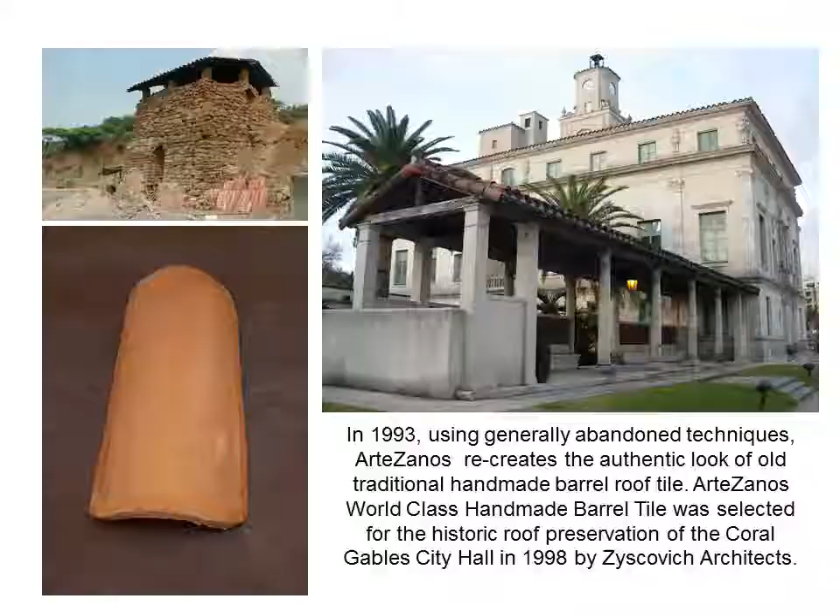During the last Florida construction boom, ArteZanos World Class was in great demand and heavily sought for top-tier projects because of its high quality and superior wind performance.

In 1999, ArteZanos gives birth to the first authentic handmade S tile named Arguey S. This product duplicated the look of the ArteZanos World Class barrel tile more competitively. For many years, it was a popular staple for large high-end developments and companies seeking that unparalleled authentic handmade look.

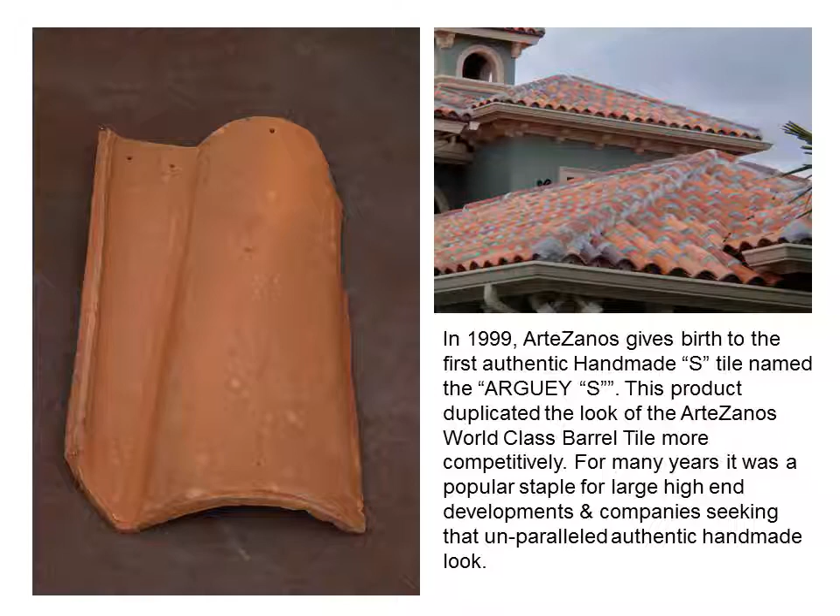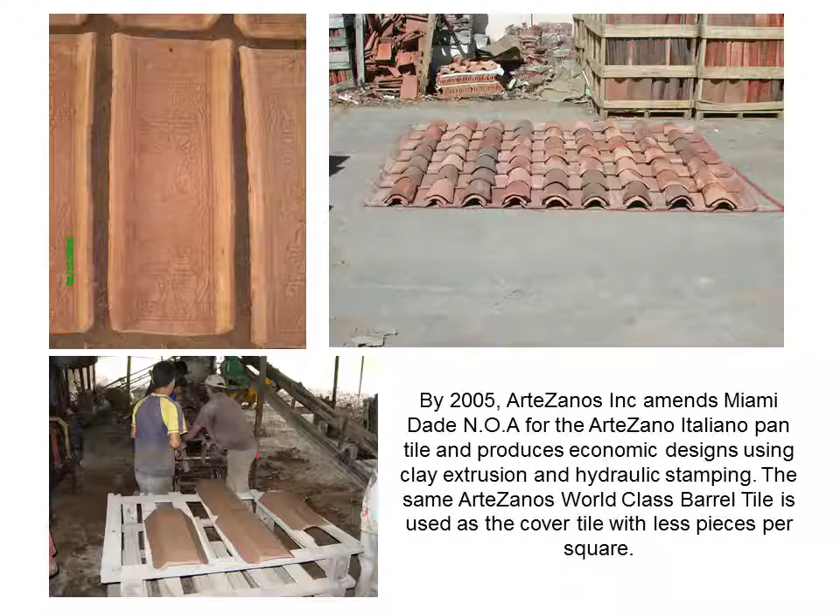By 2005, ArteZanos Inc. amends Miami-Dade County NOA for the ArteZano Italiano pan tile and produces economic designs using clay extrusion and hydraulic stamping. The same ArteZanos World Class barrel tile is used as cover tile with less pieces per square. By 2006, ArteZanos files for various U.S. and European patents on promising new design enhancements.

At the beginning of the economic recession, escalation of fuel prices and transport costs prompt ArteZanos to amend Miami-Dade County NOA in 2008 for this new lightweight hybrid barrel tile system to help reduce costs.

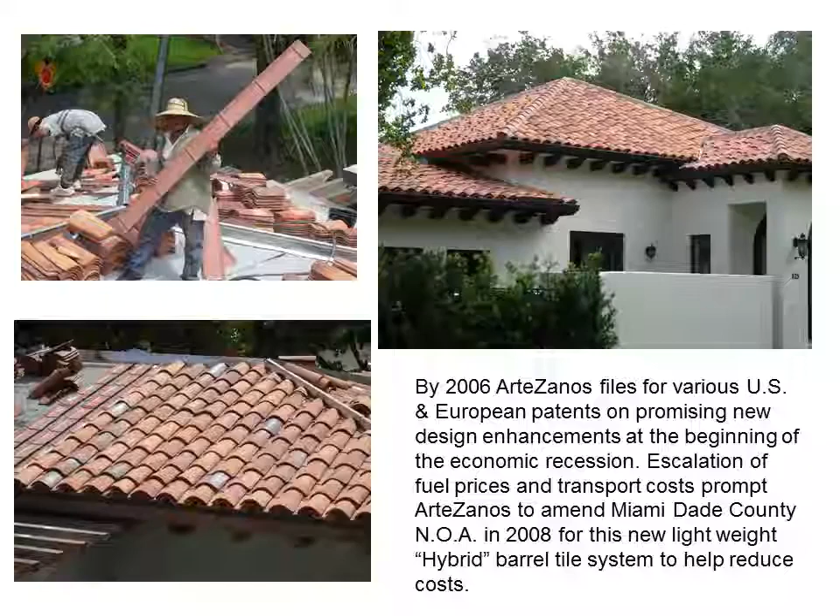Class A fire rated and superior wind uplift. The ArteZanos hybrid system is designated Class A fire tested by Southwest Research Labs. Informal uplift testing conducted at the Polyfoam Products Lab confirmed the superior uplift resistance when foamed down to a single mechanically fastened synthetic underlayment.

In 2009, the Miami-Dade County Board of Rules and Appeals rules the ArteZanos hybrid is indeed an innovative hybrid green roof system under Section 1512.2.2 of the Florida Building Code, and can be used over mechanically fastened synthetic underlayment and as a retrofit over existing asphalt shingles pending further testing.

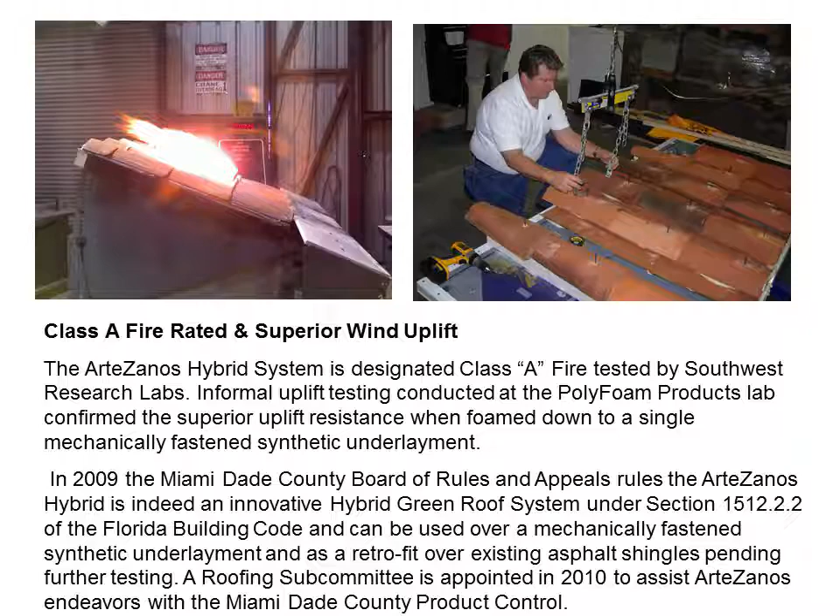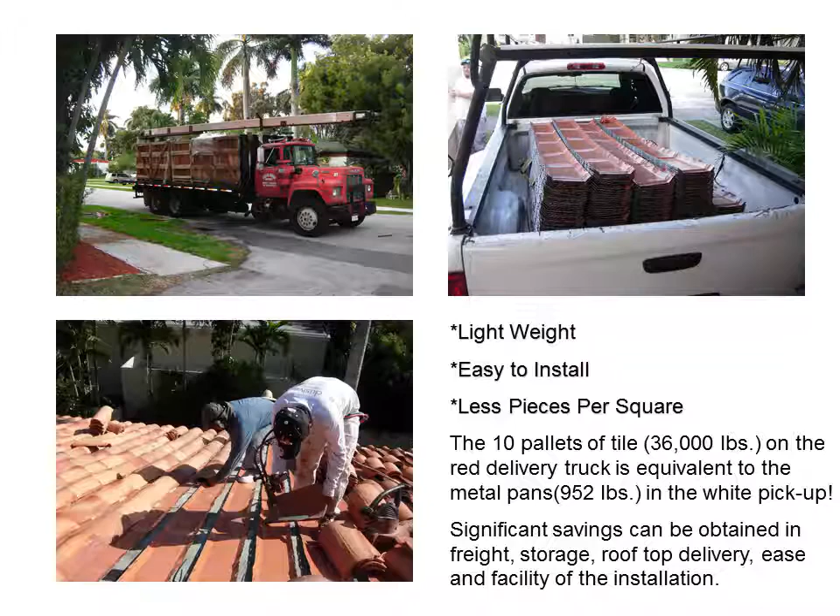A roofing subcommittee is appointed in 2010 to assist ArteZanos endeavors with the Miami-Dade County product control. Lightweight, easy to install, less pieces per square - the 10 pallets of tile on the red delivery truck is equivalent to the metal pans in the white pickup. Significant savings can be obtained in the freight, storage, rooftop delivery, ease and facility of the installation.

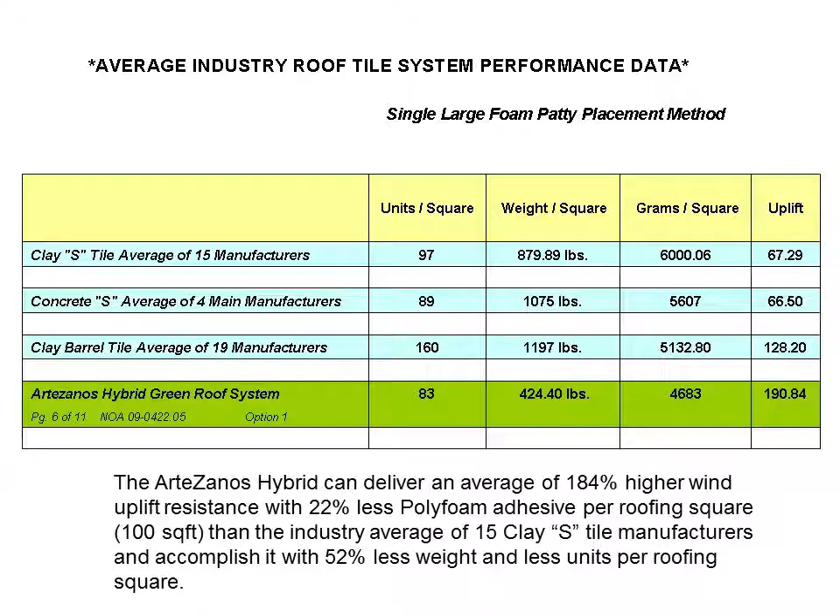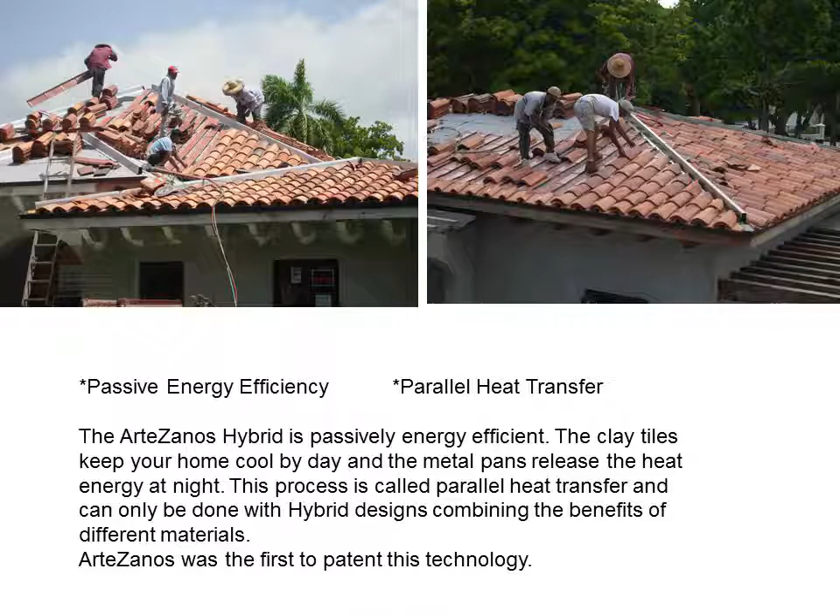The ArteZanos is passively energy efficient. The clay tiles keep your home cool by day and the metal pans release the heat energy at night. This process is called parallel heat transfer and can only be done with hybrid designs combining the benefits of different materials. ArteZanos was the first to patent this technology.

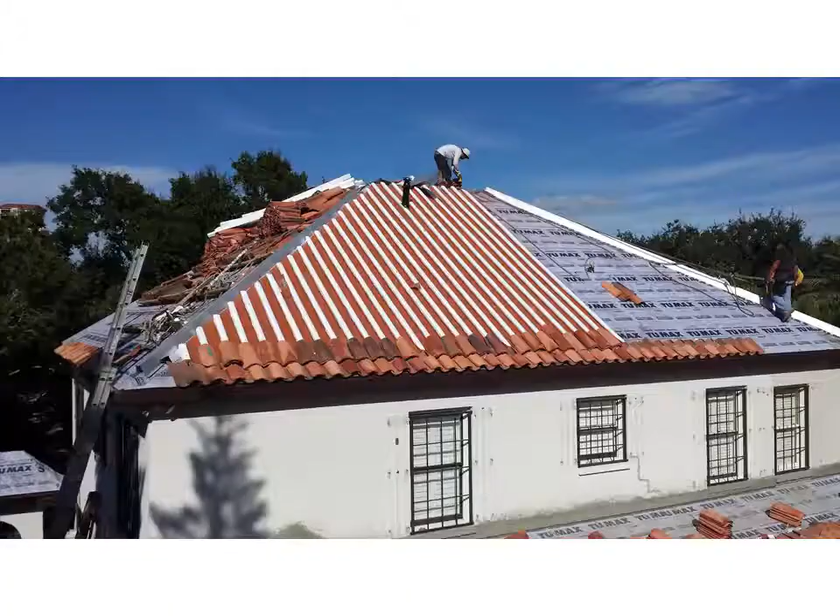ArteZanos Southern French Style Hybrid in Tampa, Florida. ArteZanos Spanish Hybrid in Vero Beach, Florida. ArteZanos Italiano Hybrid in St. Vincent, Grenadines.

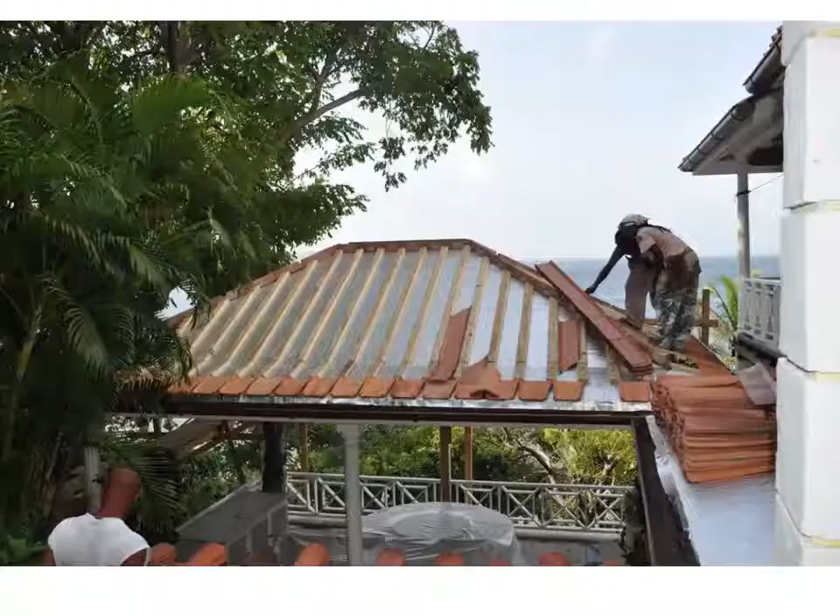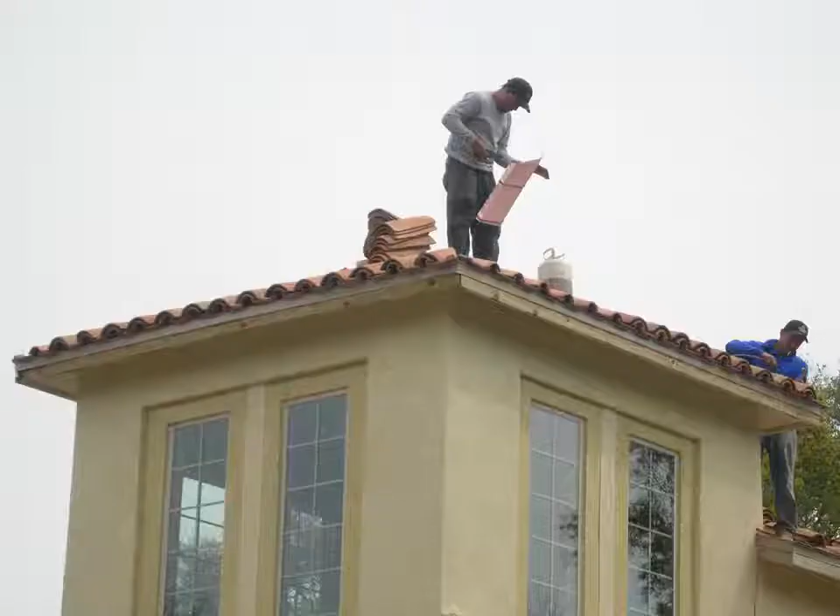ArteZanos Italiano Hybrid in St. Petersburg, Florida. ArteZanos Italiano Hybrid in Hollywood, Florida. Antique Cuban Tile Hybrid in Miami Shores, Florida.

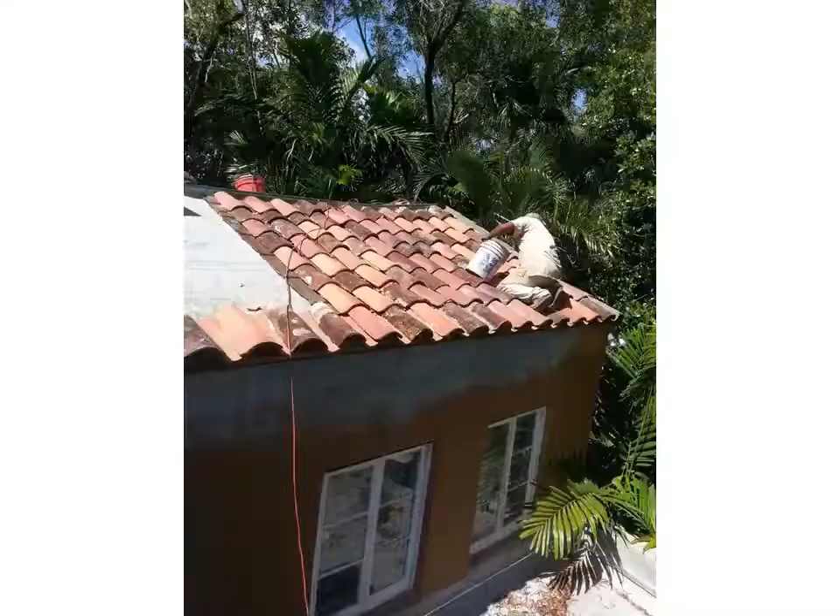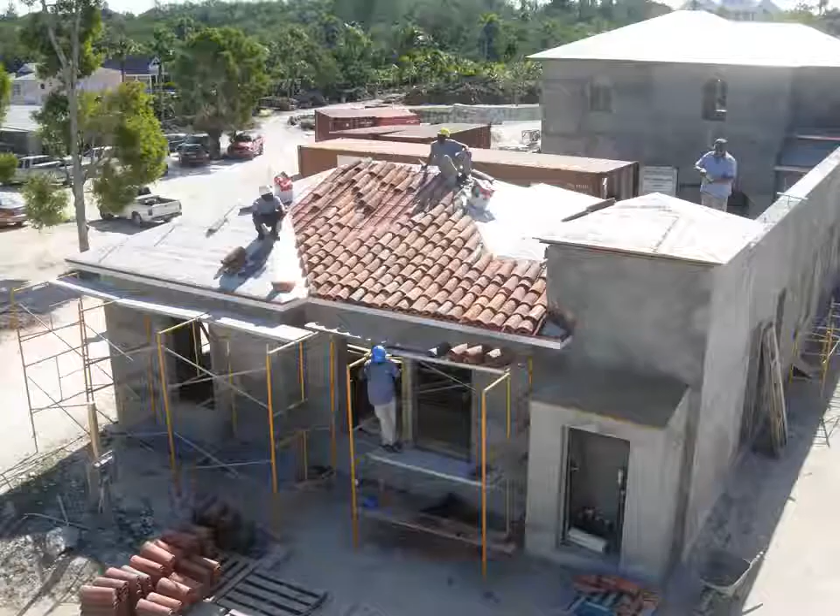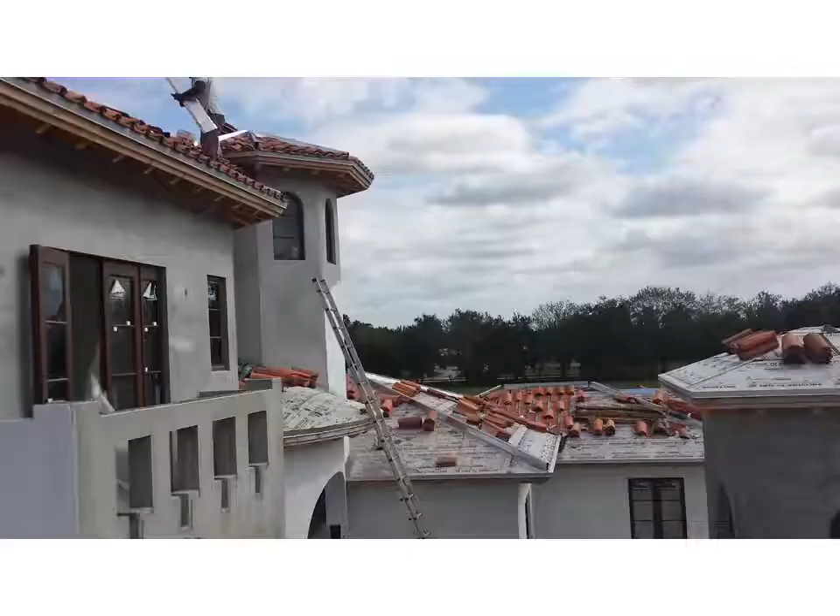MCA roof tile hybrid in Los Angeles, California. ArteZanos Spanish hybrid in Lyford Cay, Nassau, Bahamas. ArteZanos Italiano hybrid in Southwest Ranches, Davie, Florida. ArteZanos Italiano hybrid, Miami Beach, Florida.

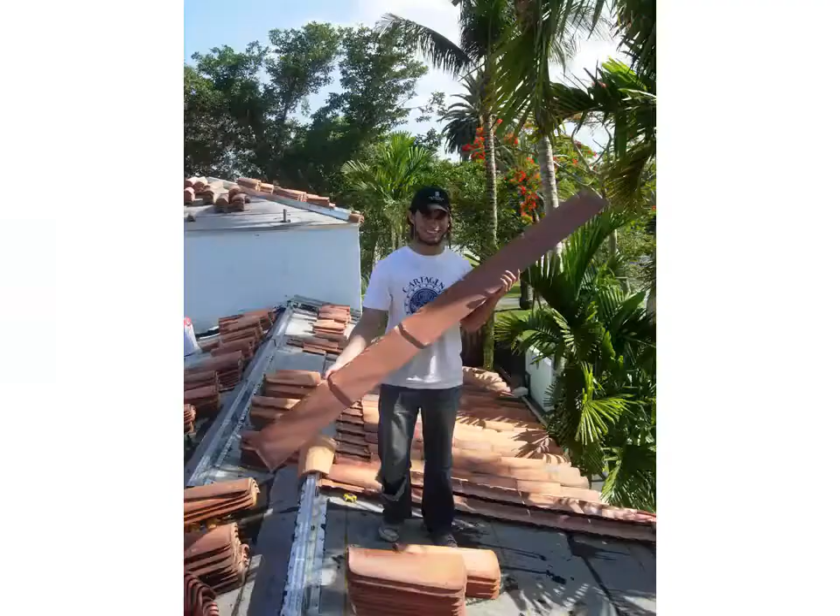ArteZanos Spanish hybrid in Miami Beach, Florida. ArteZanos Italiano hybrid in Miramar, Florida.

Solar thermal option. Domestic hot water can be economically integrated with PEX tubing underneath the roof tile for hot water production, and qualify for a 30% federal tax credit on the entire investment with no cap limitation until December 31st of 2019.

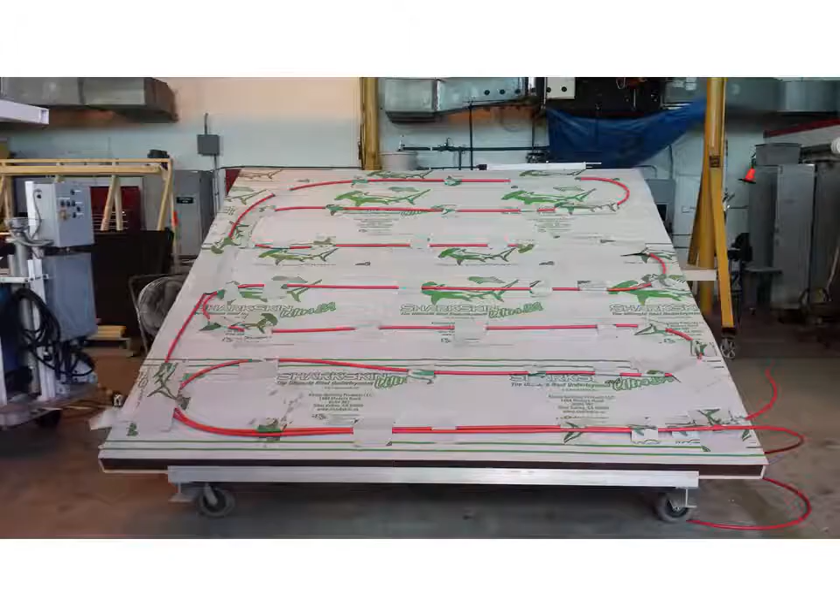The ArteZanos RISA, Roof Integrated Solar Absorber, is certified by the Florida Solar Energy Center, FSEC, number 100-572, and can qualify the roof envelope as a non-glazed solar energy collector.

No penetrations. The ArteZanos solar thermal tubing can easily be fixed to the underlayment without penetrations. This is a very simple process used to harness the heat energy already on the roof to heat water instead of using more expensive electricity.

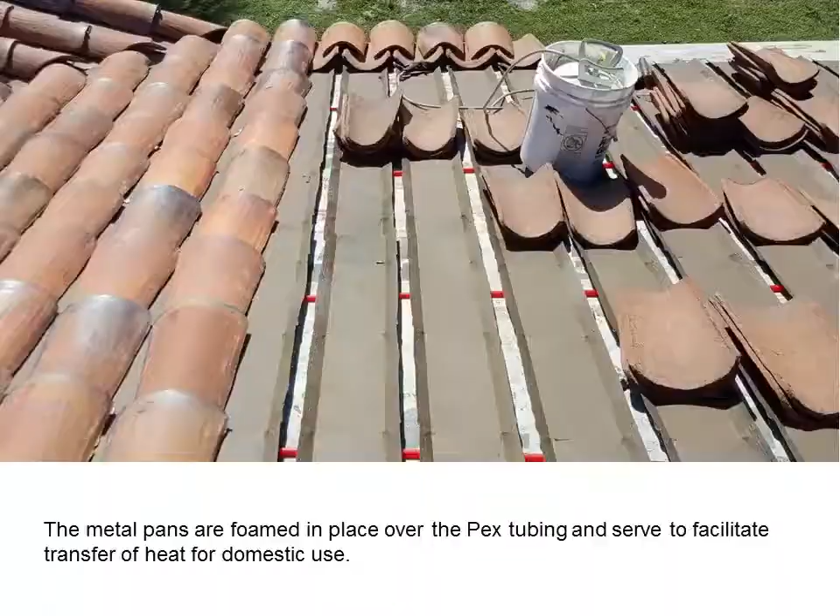The metal pans are foamed in place over the PEX tubing and serve to facilitate transfer of heat for domestic use. Invisible solar thermal - the ArteZanos RISA solar thermal is completely stealth and the most affordable way to integrate solar domestic hot water and/or pool heating systems to the roof.

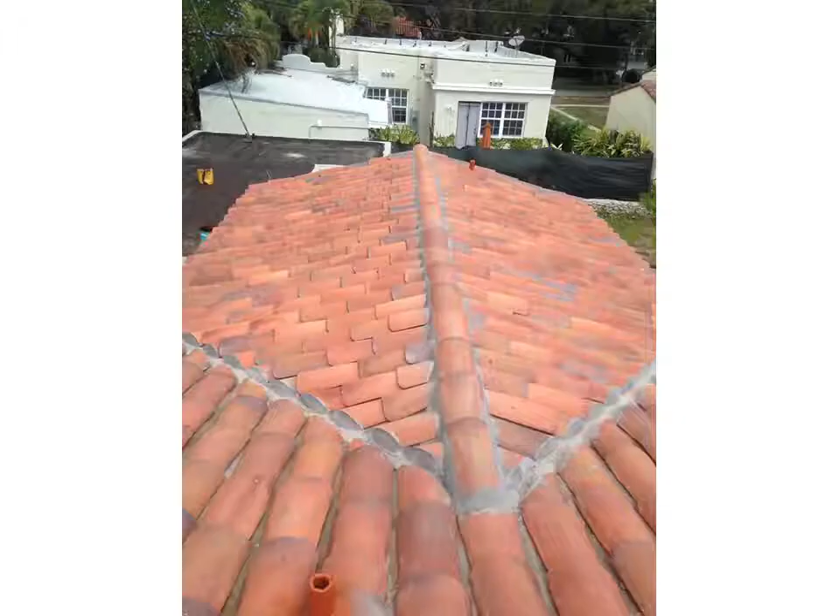ArteZanos hybrid with invisible solar thermal located in Coral Gables, Florida.

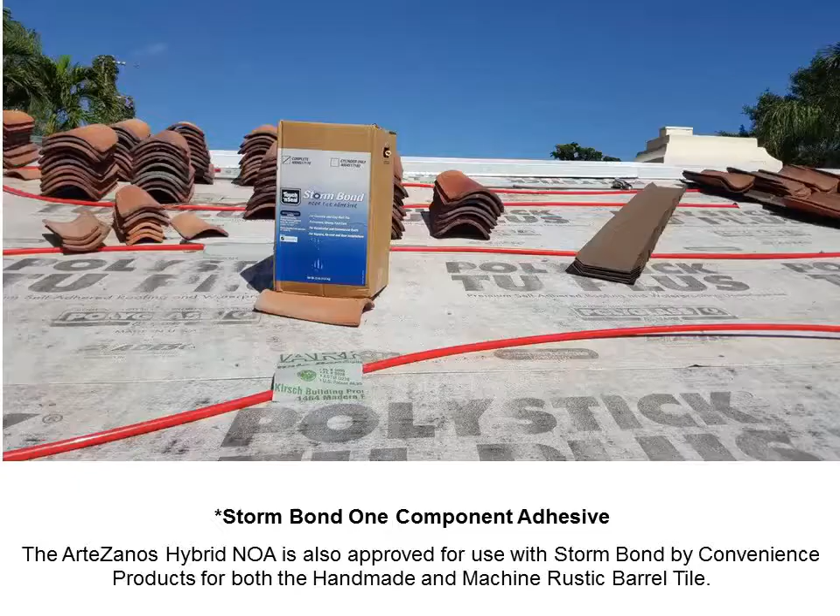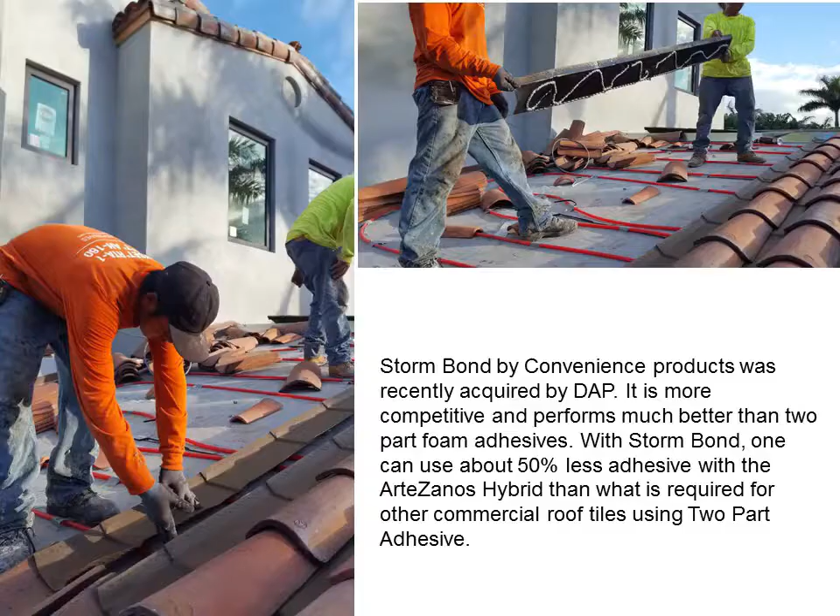Storm Bond 1 component adhesive. The ArteZanos hybrid NOA is also approved for use with Storm Bond by Convenience Products for both the handmade and machine-made rustic barrel tile. Storm Bond by Convenience Products was recently acquired by DAP. It is more competitive and performs much better than two-part foam adhesives. With Storm Bond, one can use about 50% less adhesive with the ArteZanos hybrid than what is required for other commercial roof tiles using the two-part adhesive.

ArteZanos hybrid with invisible solar thermal in Miami Beach, Florida.

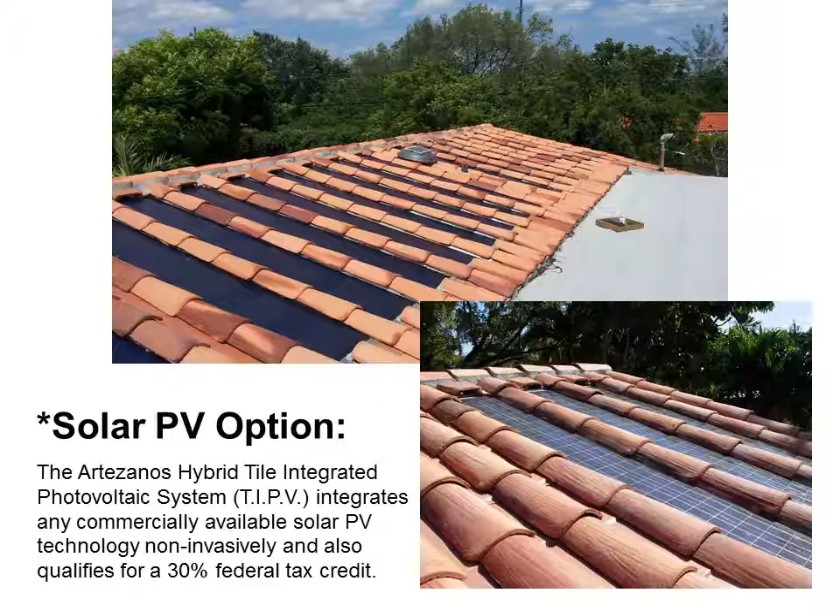Solar PV option. The ArteZanos Hybrid Tile Integrated Photovoltaic System, TIPV, integrates any commercially available solar PV technology non-invasively and also qualifies for a 30% federal tax credit.

The ArteZanos Hybrid Tile Integrated Photovoltaic System, TIPV, is recognized by the State of Florida Construction Industry Licensing Board as being the only PV system within a roofer's scope of licensure. Grid connection requires an electrician as per DEC Statement DS 2011-060.

PV and solar thermal pool heating. The ArteZanos TIPV can be integrated with both domestic hot water and/or pool heating. The circulation of cool pool water through a hybrid roof can lower roof temperatures to minimize air conditioning loads.

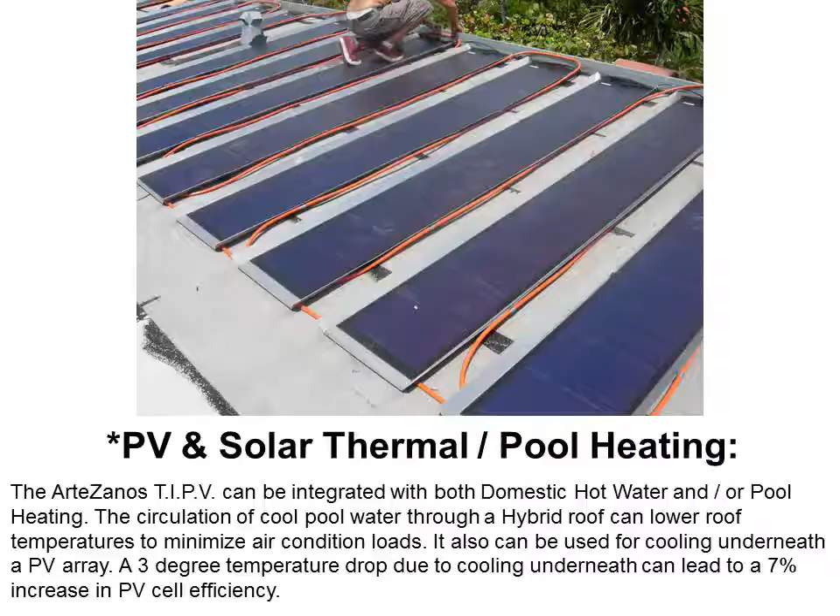Historic residence with ArteZanos hybrid TIPV and solar pool heating in Miami, Florida.

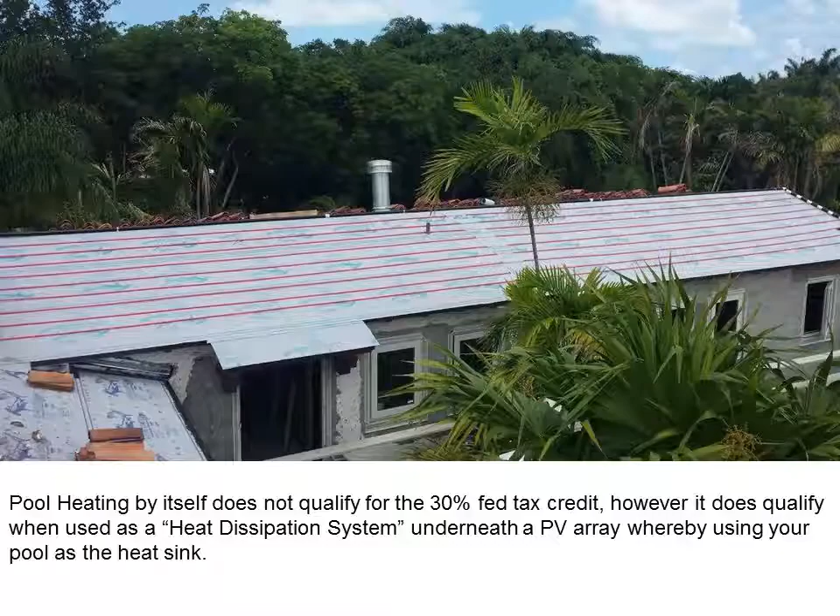Pool heating by itself does not qualify for the 30% federal tax credit. However, it does qualify when used as a heat dissipation system underneath a PV array, whereby using your pool as the heat sink. Sharkskin Ultra SA can be used to secure PEX lines in place without penetration.

It has a superior adhesion and 320-degree melting point, ideal for solar energy systems.

VersaShield is used directly beneath underlayments designated for PV array footprint to maintain the Class A fire rating.

ArteZanos solar metal pan above, SoloPower SP1 flexible CIGS solar module below. The Storm Bond is ideal for adhering the SoloPower SP1 to the ArteZanos solar metal pan because it has a low rise and minimal exothermic reaction. It will not harm the PEX tubing as well.

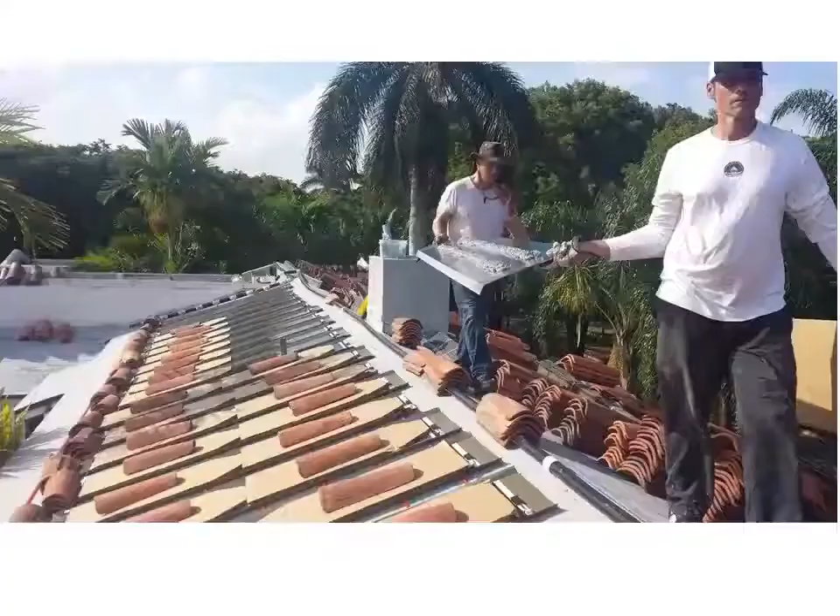Made in USA. SoloPower SP1 flexible CIGS solar modules are made in Portland, Oregon. They are lightweight and conveniently installed without any penetrations to the roof deck. The SoloPower SP1 is flexible, durable, and made without glass.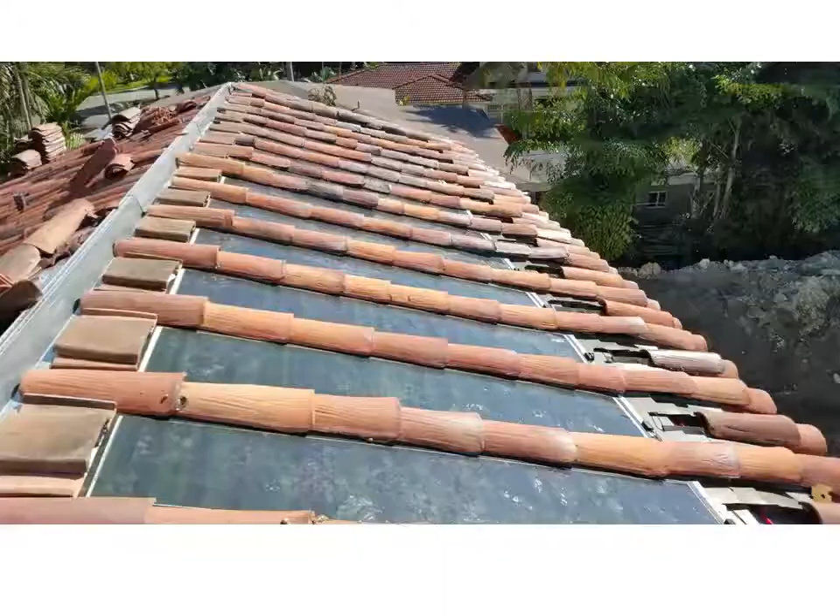Stacked eave treatments using ArteZanos baby barrel tiles make this install unique.

Designed for minimal visual impact, the ArteZanos TIPV on the second story is just barely visible from the extreme rear of the residence. The solar PV array also offsets traditional roof tile expense by eliminating tile area now occupied by solar.

ArteZanos Hybrid TIPV and Solar Thermal in Miami Beach, Florida. Rear view.

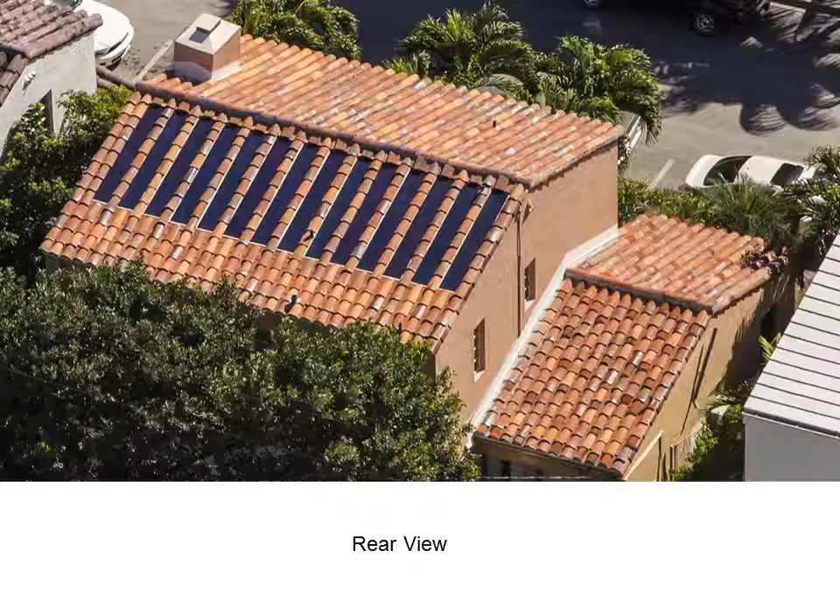ArteZanos Hybrid TIPV with integrated solar pool heating in Miami, Florida.

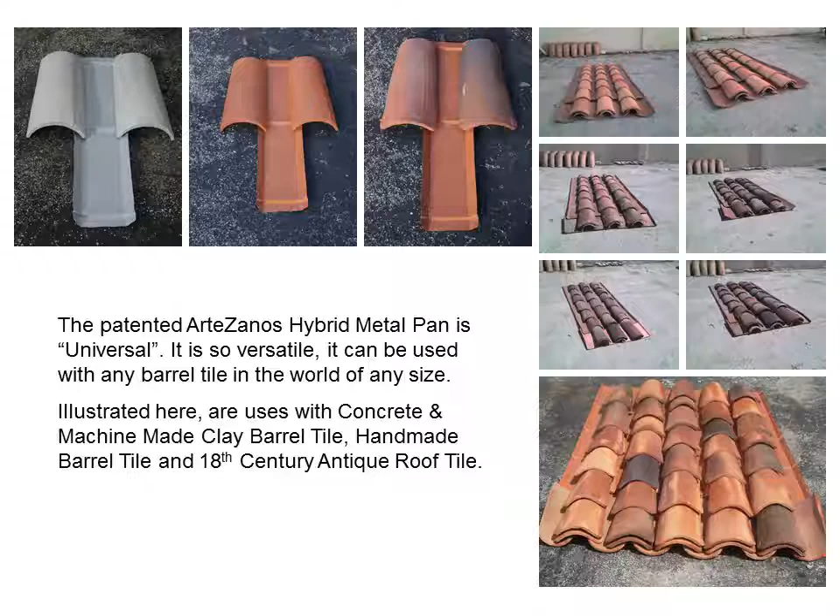The patented ArteZanos hybrid metal pan is universal. It's so versatile it could be used with any barrel tile in the world of any size. Illustrated here are uses with concrete and machine-made clay barrel tile, handmade roof barrel tile, and 18th century antique roof tile.

Baby barrel miniature tile accessory. ArteZanos vented eave closure. The baby barrel tile can be used as stacking along perimeters for many different architectural looks. It eliminates mortar and associated work, strengthens, allows for positive water drainage and ventilation. The tiles are an affordable and safe way to comply with RAS 120.

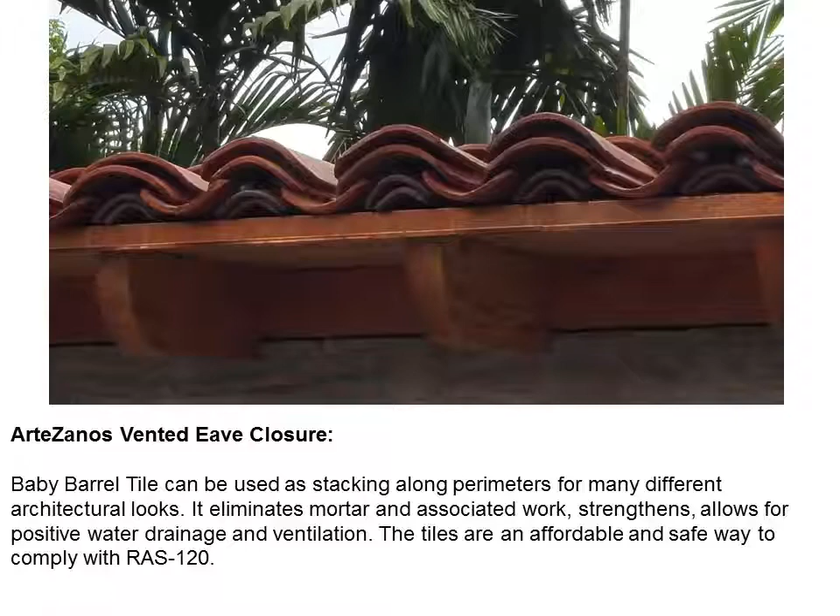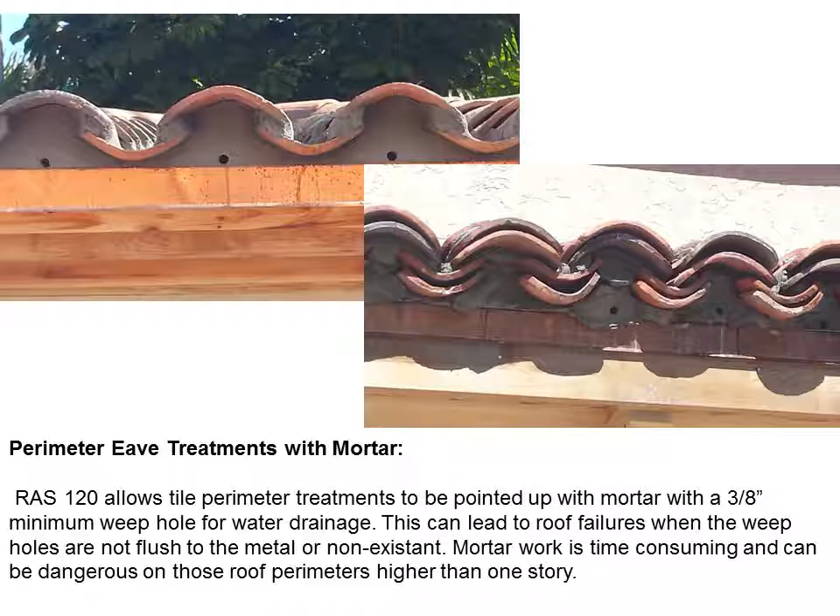Perimeter eave treatments with mortar. RAS 120 allows tile perimeter treatments to be pointed up with mortar with a 3/8 inch minimum weep hole for water drainage. This can lead to roof failures when weep holes are not flush to the metal or non-existent. Mortar work is time-consuming and can be dangerous on those roof perimeters higher than one story.

ArteZanos vented eave closure at the residence of D. Wade, located in Miami Beach, Florida.

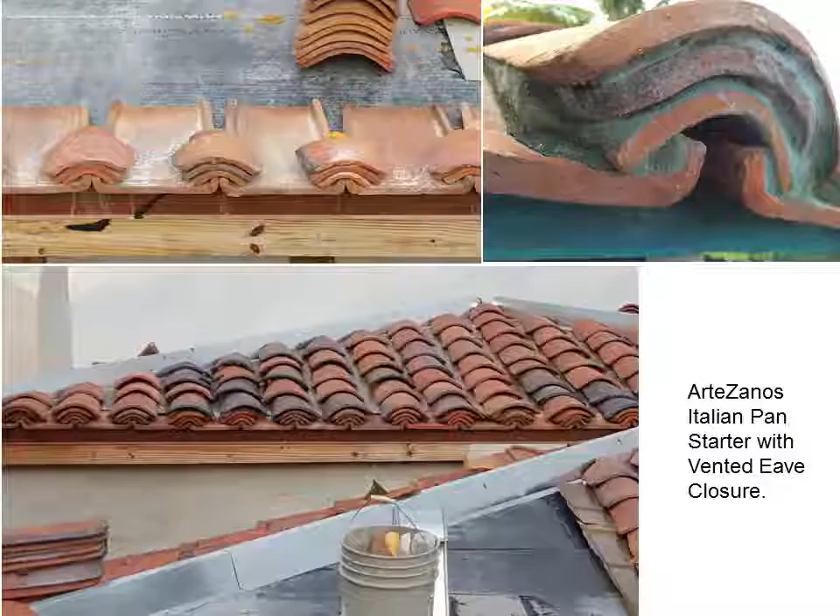ArteZanos Italian pan starter with vented eave closure.

ArteZanos Italiano hybrid with invisible solar thermal, with 30% rustic machine-made covers and 70% ArteZanos handmade. The rustic machine-made can be used to lower tile costs as a pan tile or a cover tile.

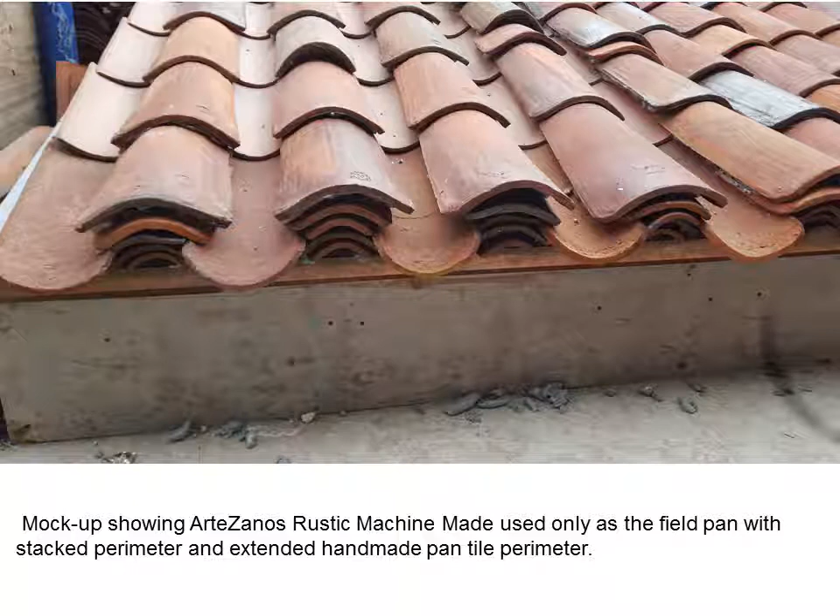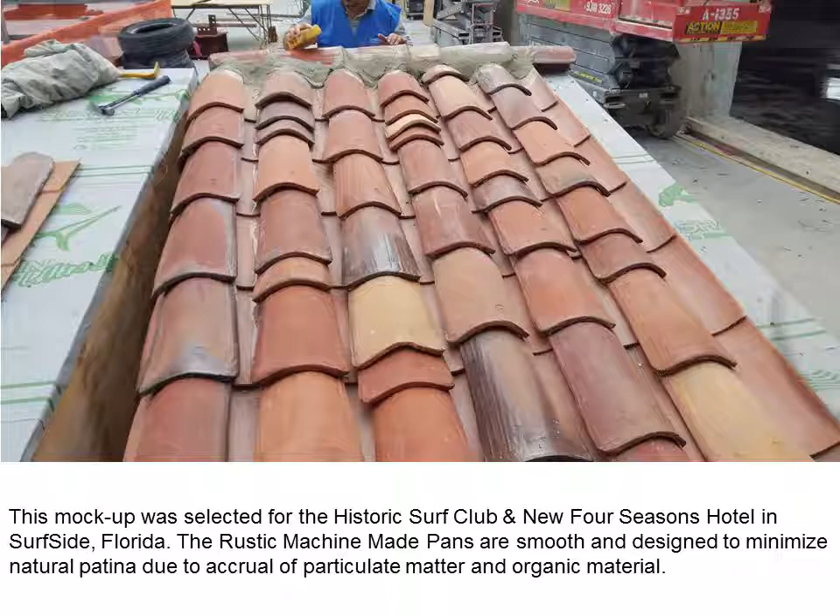Mock-up showing ArteZanos rustic machine-made used only as a field pan with stacked perimeter and extended handmade pan tile perimeter. This mock-up was selected for the Historic Surf Club and new Four Seasons Hotel in Surfside, Florida.

The rustic machine-made pans are smooth and designed to minimize natural patina due to the accrual of particulate matter and organic material. The ArteZanos rustic machine-made pan allows for better installation performance due to its uniformity.

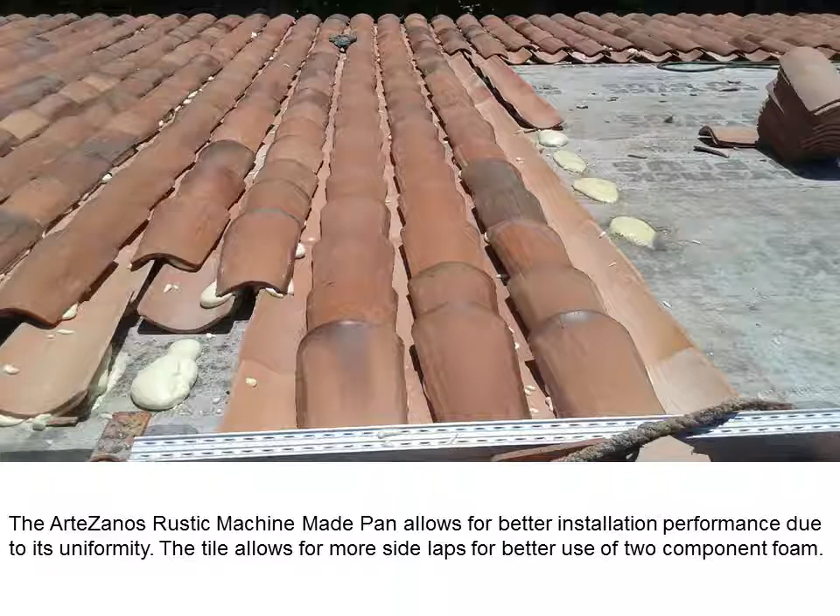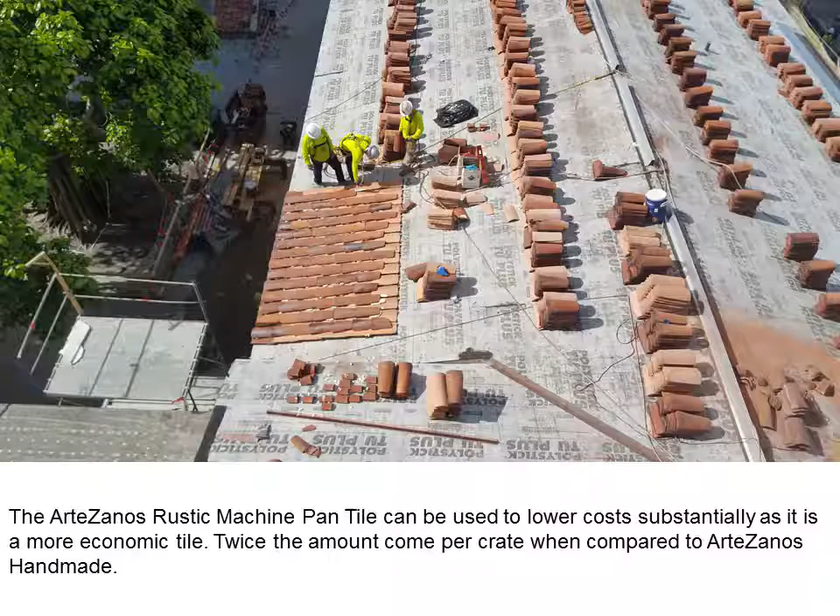The tile allows for more side laps for better use of the 2-component foam. The ArteZanos rustic machine-made pan can be used to lower costs substantially as it is a more economic tile, with twice the amount coming per crate when compared to ArteZanos handmade.

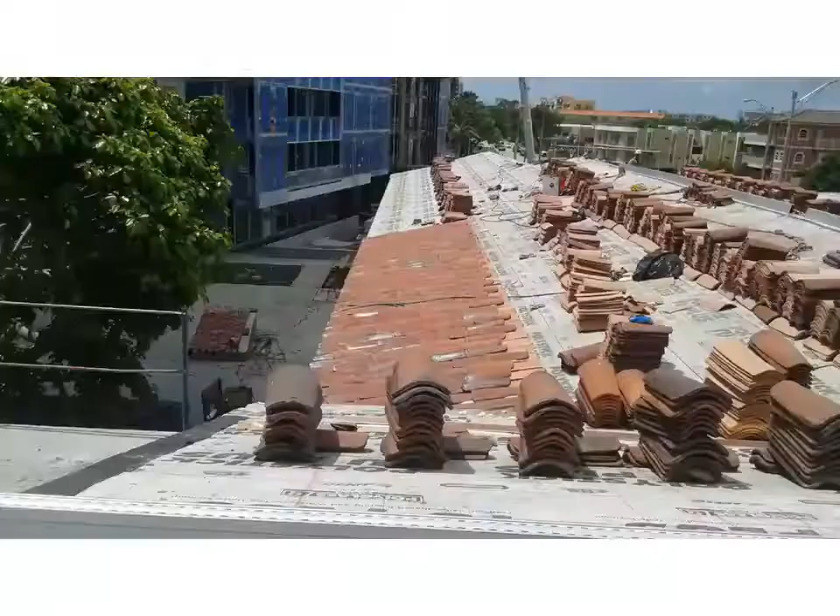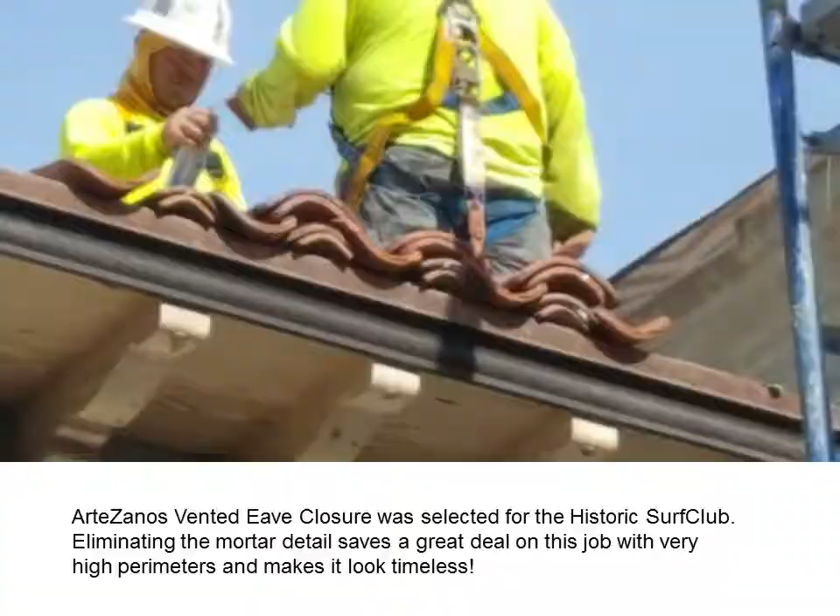Eave closure was selected for the Historic Surf Club. Eliminating the mortar detail saves a great deal on this job with very high perimeters and makes it look timeless.

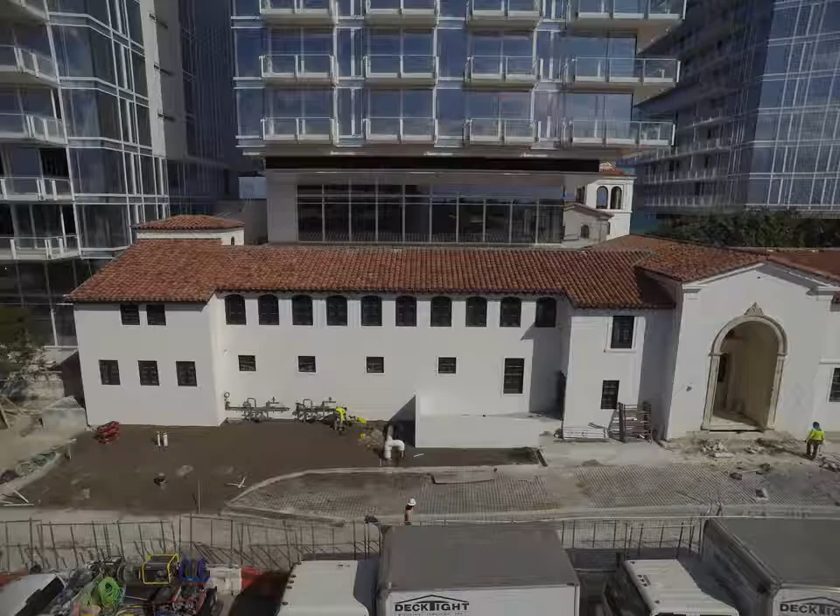Historic Surf Club and new Four Seasons Hotel in Surfside, Miami Beach, Florida.

Retrofit hybrid. ArteZanos is the only hybrid retrofit over existing shingles that can affordably deliver energy efficiency, superior wind uplift, increased curb appeal, and many green options including solar integrated PV and solar thermal.

Elon Musk, the CEO of Tesla, announced last August 2016 that he was working on a solar roof design and wished to purchase the company he founded, SolarCity, for $2.6 billion. The same month, Dow Chemical announced after 5 years that they would exit the solar roof market and discontinue their Dow solar shingle offering.

Mr. Musk has made a successful track record of making the impossible possible. His latest endeavor is to create a solar roof product that is aesthetic and performs well as a roof.

As the founder of SolarCity, Mr. Musk had the biggest company in the U.S. installing traditional rack-mounted crystalline glass panels with invasive penetrations to the roof for no money down and leased for 20-year terms. In many cases, the roofs were not suitable for optimizing a solar installation. Typically, a roof would need a minimum of 20 years.